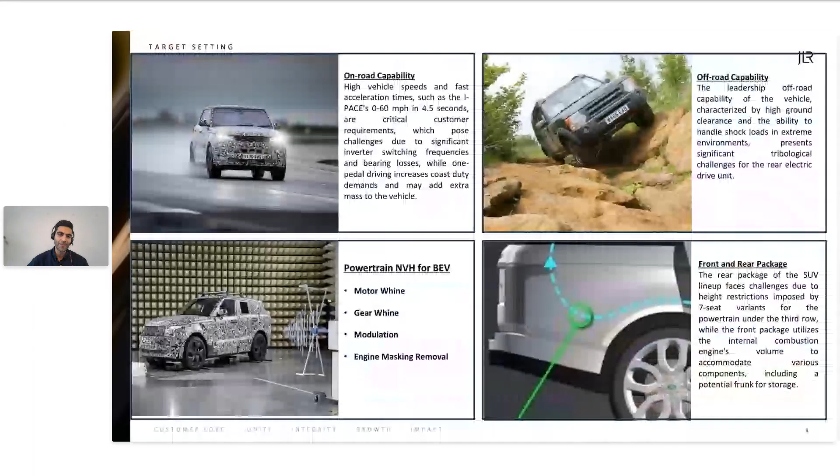Talking about electric vehicles, we have to appreciate the challenges that development of electric drive units is facing in industry. First would be delivering the first attribute and on-road capability of electric vehicles, which is associated with challenges different from internal combustion engines due to the presence of different torque and speed relationships, which I'm going to talk about in a few minutes. I've highlighted here, for example, the fast acceleration of EVs, which applies challenges in tribological contacts.

But on top of all these on-road capabilities, our products are also capable of off-road performance. Off-road performance means not only do we have to have performance within the defined duty cycles, but there are some other duty cycles that mean there are shock loads applied to our transmission components, and shock loads mean new tribological challenges.

In addition to these challenges, we all know that battery electric vehicles are facing some NVH limitations, known as noise, vibration, and harshness. In particular, in transmission development, we are mainly interested in two main challenges known as heterodyne and gear whine. Heterodyne is when two excitations are closely captured but also interacting with each other, and they can cause noise and vibration. Gear whine mainly comes from the contact between the gears in the powertrain, and could be caused by transmission error. So it becomes extremely important to design our transmission systems to avoid these NVH problems.

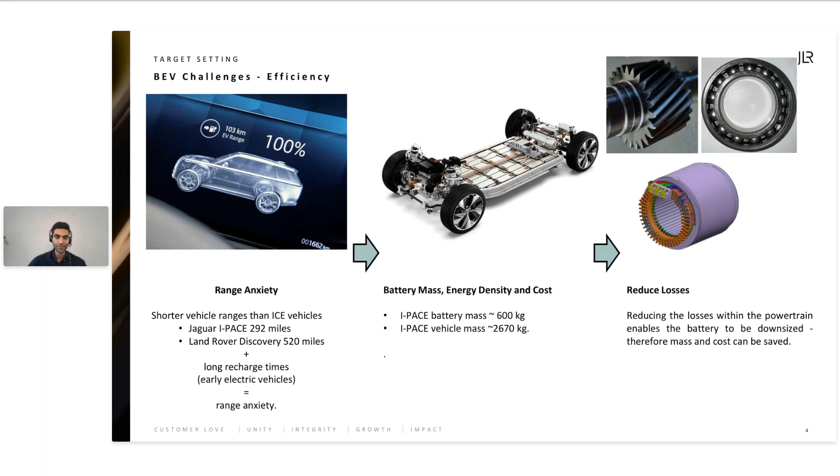It's a good time to talk about the main difference between electric vehicles and internal combustion engines in terms of how torque is delivered within the transmission. In internal combustion engines, we need a certain range of velocity to deliver the required torque, meaning over different velocity profiles we need to change gears to get the required efficient torque transmission.

In electric vehicles, that's different. We can start delivering torque at really low speeds, and therefore we understand the tribological challenges associated with that. The torque then reduces with velocity in order to keep the power constant, so we have constant power at the second curve you're seeing there.

With new developments in electric vehicles, we're moving towards higher speeds and therefore facing new challenges in tribology and tribological contacts, which I'm going to talk about in the next few slides.

Talking about design of EDUs and looking at their efficiency, on the right-hand side you'd see that EDUs are made of three main components: transmission system, e-machine, and inverter, each with a different efficiency profile with respect to motor speed.

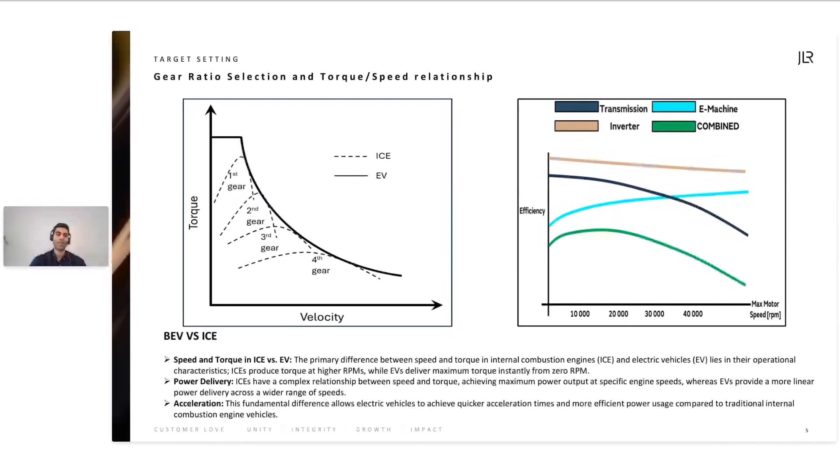But we have to be careful that the efficiency of the e-machine increases gradually with the increase in e-machine speed. Therefore, we have to find a sweet spot for the system where the efficiency of the entire EDU is optimized. This is why we at the transmissions team work closely with our colleagues on the e-machine, cascading requirements between the two teams.

In the next section, I'm going to talk about EDU transmission concepts and a comparison between what we had in ICE and what we're facing in the realm of EVs.

Here you can see on the left-hand side an 8-speed automatic transmission, and on the right-hand side a typical electric drive unit transmission. At first look, there's probably a lot less complication in development of EDU transmissions in terms of architectural complications.

On the left-hand side, you have clutches to take care of and a very complex lubrication system. On the right-hand side, the complexity has been reduced.

There are new challenges we're facing in development of these gear and bearing systems. They're usually two gear stage systems, which I'll talk about for different configurations, but we're facing new challenges compared to what we faced with automatic or manual transmissions for internal combustion engines.

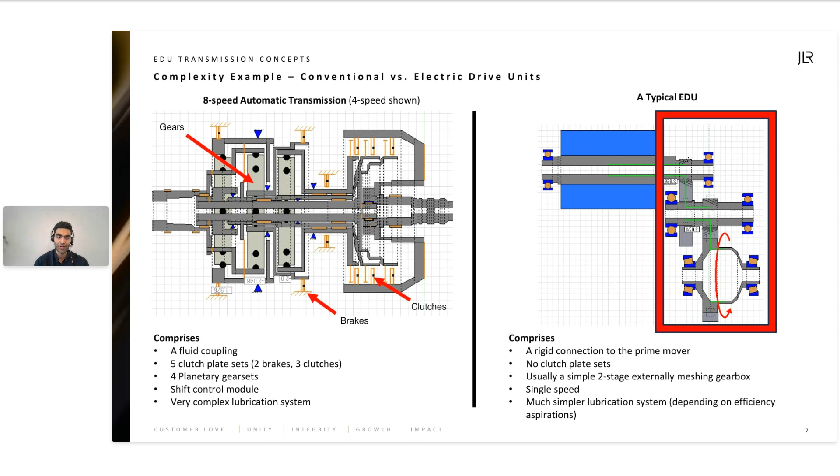In this slide, I'm particularly looking at 2 common types of transmission system. Left-hand side is the concentric layshaft layout, and on the right side, the offset layout. For the concentric one, the e-machine rotor, which is at high speed, is concentric with the output shaft, which is on the right-hand side. That means in order to accommodate them both in the same axis, our EDUs would be wider.

There are some advantages and disadvantages to this configuration. Advantages being compactness of the design, but also wider. Disadvantages, if you look at the 2 gear stages, the center distance between the 2 pinion and the gears is the same, which means the second and first gear stage have the same center distance, and usually the first gear stage is not optimized for performance.

On the other hand, on the right-hand side, you can see the first rotor shaft being connected to an intermediate shaft, and then the intermediate shaft with gear stage 2 being connected to the differential and the output shaft. In this case, you could have better control over the design of your bearings and gears and their sizes. And of course, your EDU would be larger and have a higher volume. So that's the trade-off between efficiency and packaging.

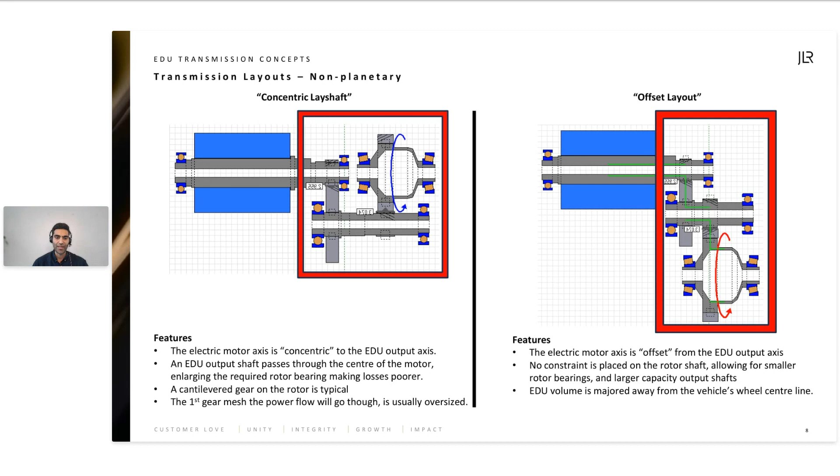The next transmission concept is the planetary concept, which is probably the least common among the 3. The reason is there are quite a lot of challenges associated mainly with NVH problems and the efficiency of the system. NVH because you're having a sun gear in the middle and 3 planetary gears in contact at the same time, which means you would probably look into some heterodyne or gear whine issues because of 3 contacts happening at the same time.

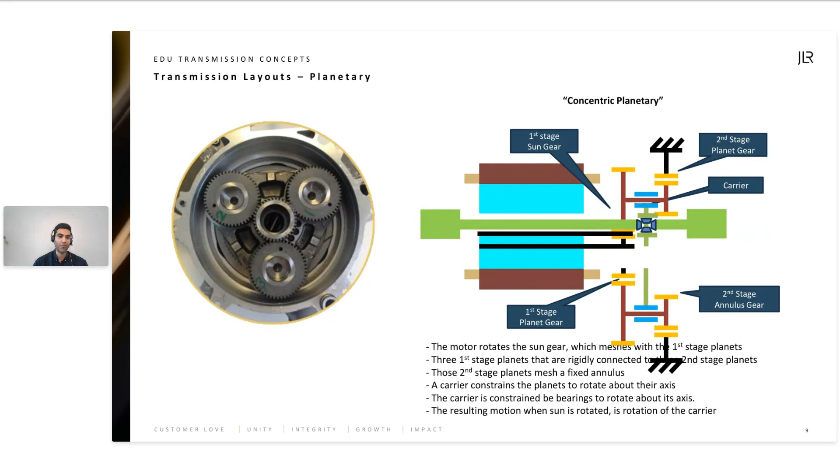And of course, you would have more contact happening, therefore more frictional losses, which is unwanted within the EDU, and we are working hard towards efficiency. Therefore, that would be a challenge for us.

Now that we have talked about different configurations of the transmission system and everybody understands what components we have within the system, let's talk about the main EDU losses, and I would then dive deeper into transmission losses, which tribology would play a great role in. So if we look at EDU, it's made out of e-machine, which is motor, inverter, and the transmission.

Of course, some low voltage components such as the oil pump and the valves and some other components that are consuming power within the EDU. For the E-machine, the main losses are mainly electrical related losses, such as iron losses and copper losses, but also we would have the shaft rotating at high speed, therefore we would have some drag, friction and windage.

What I'm going to be focusing on today would be mainly around the transmission losses, which are our tribological losses, mainly due to the gear mesh, the bearings, and the dynamic seals. I wouldn't focus today on the dynamic seals because that's the least out of these three. But of course, our gear also experiences churning and windage losses as well.

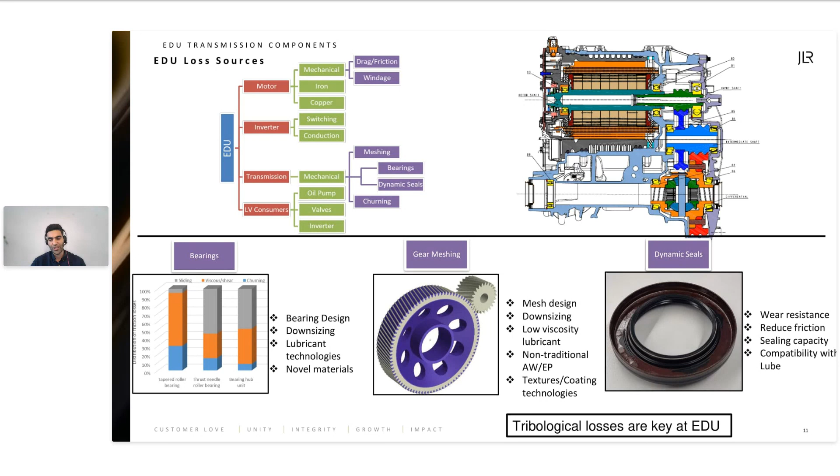We need to understand that within the EDU, we would have different shafts rotating at different speeds. Therefore, selection of gears and selection of bearings based on their performance becomes extremely important to avoid the inefficient operation of the components.

The main two probably being the torque speed, but also we have to consider the fact that our lubricants are lower viscosity lubricants in the EDU. So E-fluids are usually a lower viscosity, so I'm going to talk about them later.

Understanding that for the same speed, you're experiencing an extended boundary and mixed lubrication regime. And therefore, our gears and our bearings have extended more severity of contact, which should be taken into account.

So just to highlight the challenges we're facing within the contact of bearings and gear mesh is, of course, the high speed we're experiencing for our bearings and gears, and that means high contact temperatures and high thermal losses.

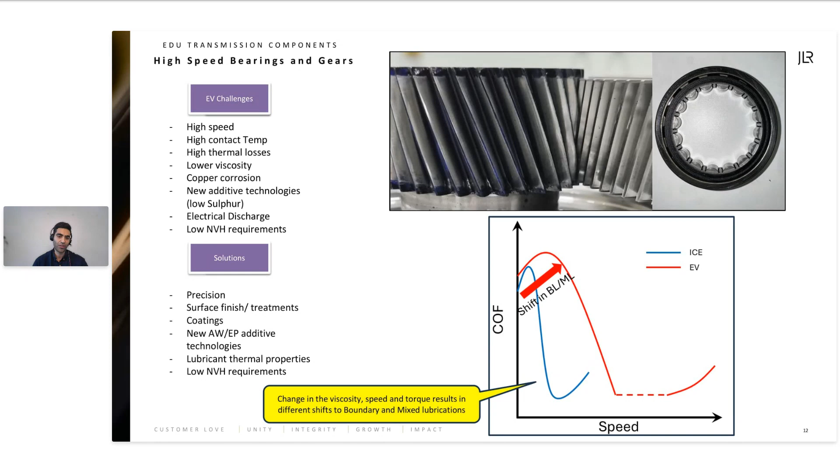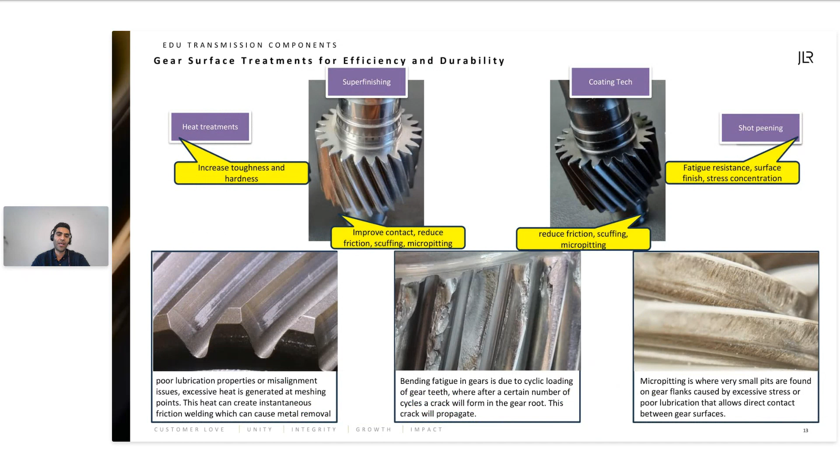I have highlighted three main failure modes that our gears are experiencing: scuffing, bending fatigue, and micropitting, each explained in the text. There are routine surface treatments to increase the efficiency of these components, but also their durability. Heat treatments are conducted to increase the toughness and hardness of gears. Super finishing, although expensive, is an important surface treatment to improve contact, reduce friction, and thermal dissipation at the interfaces, therefore reducing scuffing and micropitting. Coating technologies could also help reduce friction and increase scuffing and micropitting performance of the gears. And shot peening is something the gear industry has been doing for quite a few years.

Talking about the contact, we would have lubricated contacts within the EDU, which means the lubricant would play a major role in the tribology of electric vehicles.

There's a big demand for OEMs and lubricant suppliers to understand this region of application for extreme pressure and anti-wear additives.

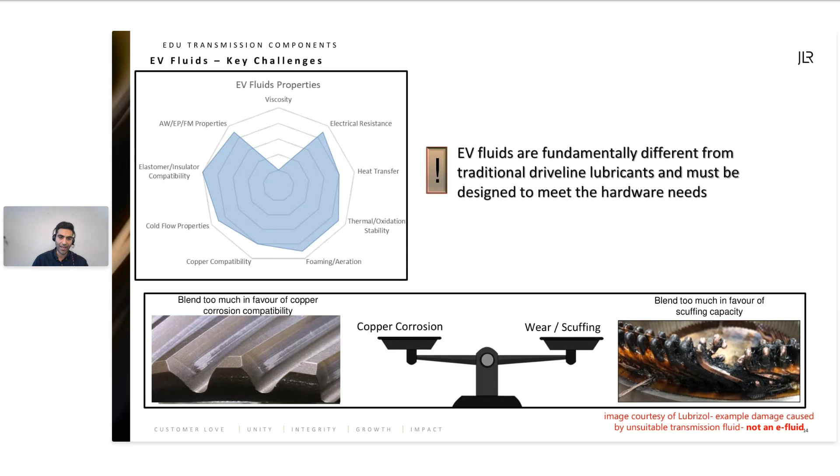In this slide, I would be talking about electrical conductivity. We all understand that within an EDU, there would be high electric fields and high magnetic fields. That means the lubricant should be compatible in this scenario, which means we want the lubricant to have certain electrical properties.

Lubricants should be dielectric, which means it's really important that they have certain electrical resistivity. We want them to have high resistivity, but we don't want the resistivity to be too high, because if they don't dissipate charges, it means charges accumulate and lubricant additives degrade. So that is unwanted. There is actually a range of electrical conductivity that we would like to see. If the electrical conductivity of the lubricant and the dissipation factor are not working well, you would see all sorts of problems within the EDU, such as additive degradation, bearing and component damage, electric discharge, etc.

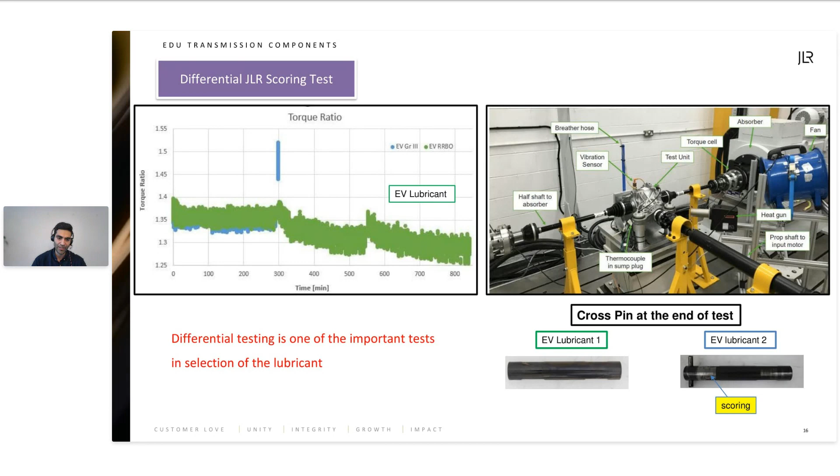Last but not least, we have worked hard to understand how these new additive technologies work within our transmission system in terms of friction, and the friction properties are of great importance to us, as we want more efficient transfer of power.

So we have been running a large number of tribo tests with the help of our suppliers to understand, in rolling sliding and in pure sliding contacts, what are the friction coefficients of the current lubricants and the lubricants that we're developing with our suppliers.

On top of that, cooling performance of our lubricants becomes really important because of the high speeds in bearings and gears, and therefore cooling them off. But not only that—it's also the e-machine that has to be cooled off if you're using the same lubricant for cooling the electric motor.

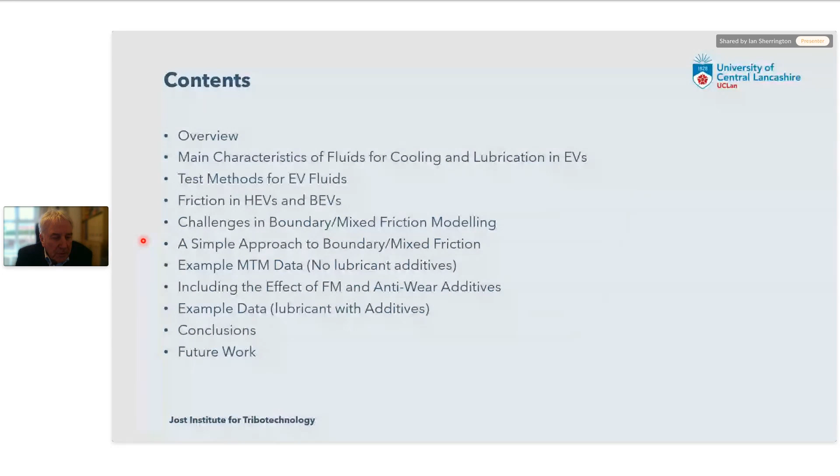The presentation will break down neatly into two parts. The first part will discuss some background on electric vehicles and electric vehicle fluids, and the second part will present this friction modeling technique. Essentially, what we've noticed is that approaches to mixed and boundary friction modeling either tend to be extremely simple or extremely complex, and in some cases generally erroneous as well, so they don't give accurate data. So what we've tried to do is produce a compromise model which will allow accurate, simple modeling of mixed and boundary friction components, and you'll see why this is in some detail as we go through the presentation.

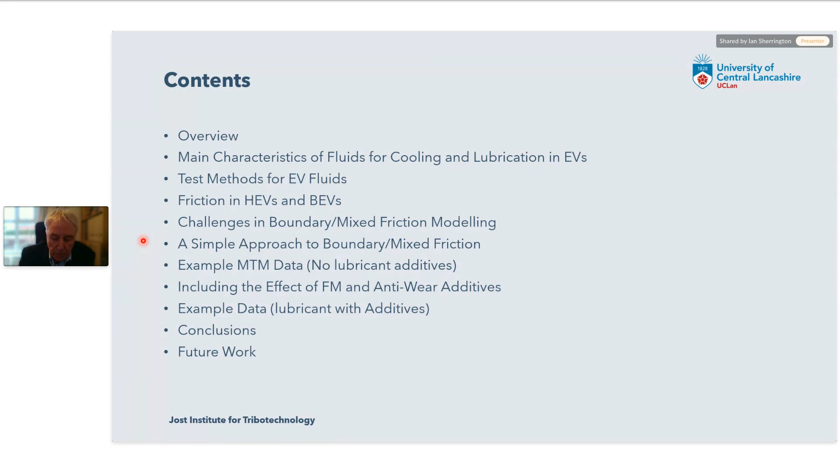So just by way of background, everybody's aware that the electric car stock globally is increasing substantially. In 2022 there were 26 million electric vehicles, but that's only between 2 and 3% of all passenger cars that we use. It's important to realize that nearly half of those are in China. China is a really big player in the EV market, not just in passenger cars but also in buses, several hundred thousand electric buses operate in China.

Although the growth of electric vehicles is rapid, there are some considerable engineering challenges being faced by this industry, and Ali mentioned some of them, but I'll mention some again. There are issues connected to manufacturing infrastructure. If we want to replace all the internal combustion engine vehicles we produce with EV vehicles, we need to considerably up the game globally to produce manufacturing infrastructure suitable for this kind of technology, particularly the batteries. The battery technology is well recognized as something that needs to rapidly improve. Ali also mentioned range anxiety, so in addition to that, not just is the range short, but the charging infrastructure is generally speaking quite poor. It's hard to find somewhere to charge your car away from where you live, and it can take quite a long time.

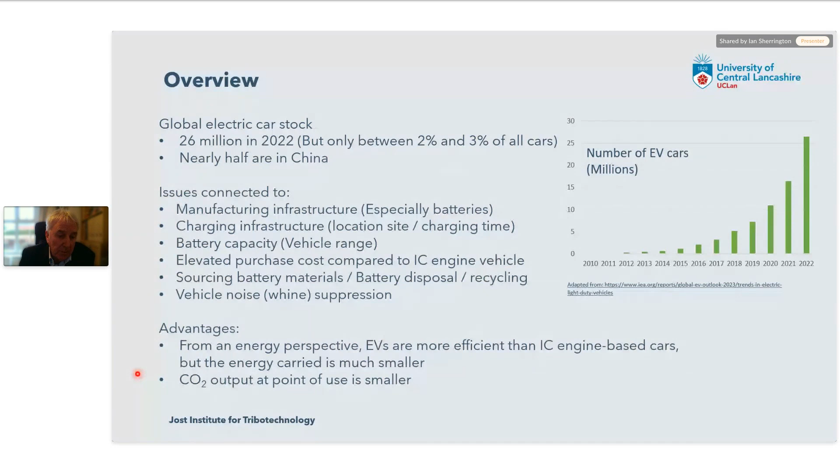We have two common types of EV, battery electric vehicles and hybrid vehicles. Compared to internal combustion engines, EV fluids need additional capabilities. For example, they need high thermal capability. You might argue that IC engines also need fluids with high thermal capabilities, but it's different for EVs because quite often they're filled for life, so we need to keep operating temperatures very low to prevent lubricant degradation.

We need to have high thermal conductivity to take the heat away from the mechanical elements that we want to cool. As one of Ali's slides ably demonstrated, there's a challenge here because the thermal conductivity and the specific heat capacity are in direct opposition, so as we increase the conductivity, the thermal capacity tends to go down.

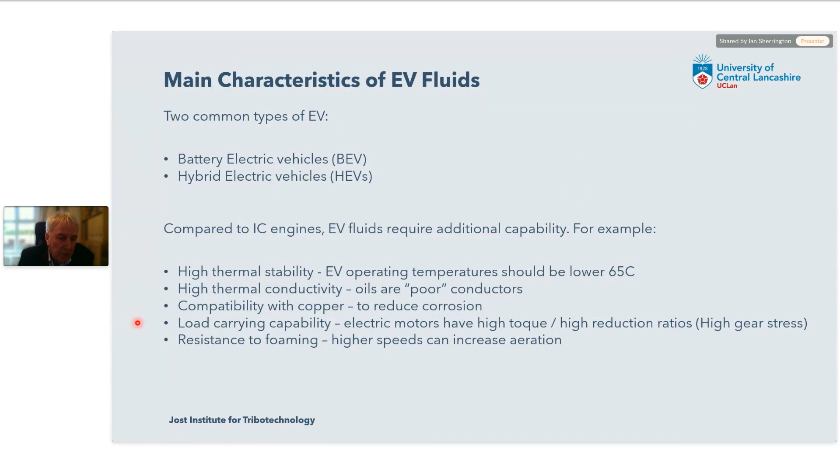We need compatibility with copper, and we need fluids that have high load carrying capability. The greatest torque appears at the lowest speeds with the highest loads, and we need to manage the high stresses that places on lubricants. And there are lots of other requirements as well, resistance to foaming and so forth.

There are a whole host of tests that we can apply to these fluids to see whether they're suitable for a particular application. This is by no means an exhaustive list, but here are some of the tests required for wheel bearing lubricants. We need to make sure these fluids pass these various tests, and the suppliers of the fluids have a significant challenge to make sure that these tests are passed in all cases for all vehicles, in the same way that we've developed these kind of global lubricant tests for internal combustion engines.

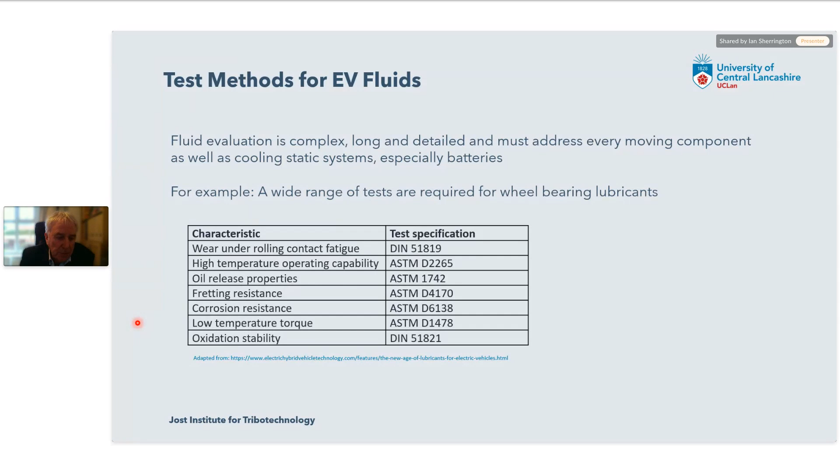And of course, to maintain the efficient operation of EVs, these fluids must have low friction. And in the same way that we want to predict the range of IC engines, we might want to predict the range of EVs. This is important because it allows us to understand what the theoretical operating range is going to be, what the charging requirements are going to be, and to some extent what the ownership costs of this vehicle are going to be from an operating perspective.

Modeling fluids has been done for a long time. Modeling contact friction has been done for a long time, and we have used various kinds of models for this. Hydrodynamic models and EHL models are well established, and running alongside that, boundary mixed friction modeling is not so well established. What we find in this instance is that these models are quite often, as I mentioned earlier, very simple but not very accurate, or complex and difficult to implement.

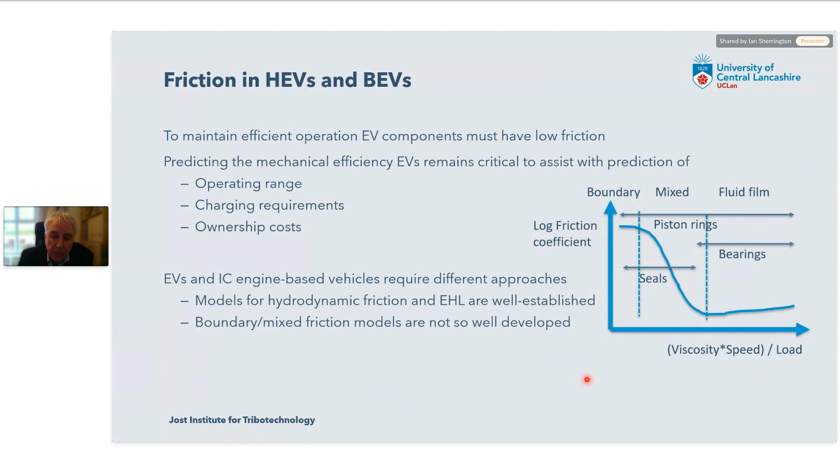And what we want to do with these models is to try and understand the Stribeck curve, try and predict the shape of the Stribeck curve, so that we can use data that we can easily get our hands on, either these duty parameters or the lambda ratio, and understand what kind of friction may result from one of these contacts. Why is that important?

Well, for a long time, internal combustion engines have been modeled using hydrodynamic lubrication. My feeling is that this has been done because it's comparatively easy to do. So full fluid film lubrication models are very common, while lubrication models which also incorporate mixed and boundary lubrication are less so. And I think it's tended to push us in the direction of believing that actually mixed and boundary friction isn't particularly important. And I think it is. I think it could be quite a significant oversight that we've made in our modeling of all kinds of mechanisms.

There's a couple of examples here. The first one is this axle mechanism. You can see that there are two power loss columns here.

Without the boundary modifier, the power losses are given in this column, but with the boundary additive, reducing the friction, you can see the friction comes down enormously. Obviously it's speed dependent, so at faster speeds the difference is less when we get a more complete fluid film, but at lower speeds we get considerable changes when we introduce this boundary additive. That means boundary friction is present, and incorporating the additive brings significant gain in reduction of friction.

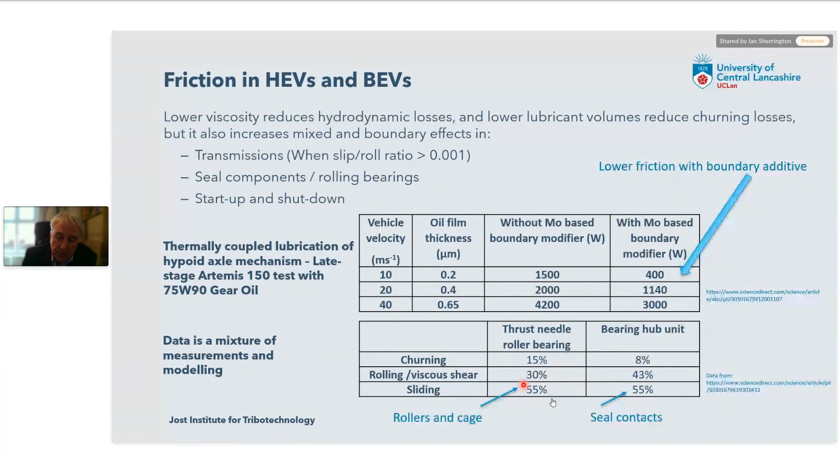Similarly, if we look at other components, such as a needle roller bearing and a bearing hub unit, you can't see this number here, but it's 55%. These proportions are a significant proportion of the losses in these particular types of component. So if we don't model these, we miss quite a lot of the friction contribution that we should be seeing in our models.

As I've said, friction coefficients can be modeled. We might use linear models, or we might use quite complex models that involve predicting the deformed real contact area using various kinds of surface contact models, such as Greenwood-Williamson, and average flow modeling to get flow coefficients for the lubricants. So they're either simple, in the case of linear models, or complex and not easily implemented.

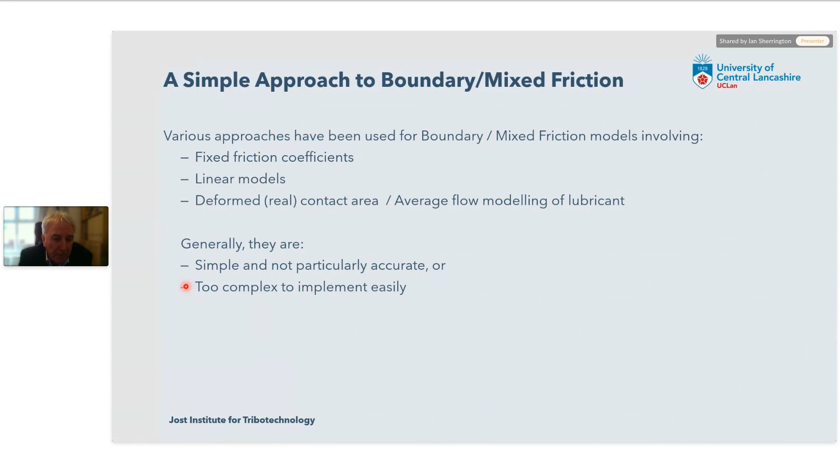What we wanted to try and do is put together a model where, if you can calculate the lubricating film thickness in a contact, you could very quickly, perhaps in an hour, build a little spreadsheet to predict the boundary and friction power losses that go along with that.

So this is how we went about that. Most of you will recognize this: the lambda ratio. We can characterize the various regimes of lubrication, boundary, mixed, and hydrodynamic, by taking the ratio of the film thickness and the square of the RMS roughnesses, or RQ roughnesses, adding them together and taking the square root. By looking at the ranges of the resulting parameter lambda, we can determine which regime of lubrication we're in: boundary, mixed, or full fluid film, as we work our way through the Stribeck curve.

Very commonly on the bottom we've got duty parameters here, which involve viscosity, load, and speed. However, we can replace this axis with the lambda value. So as the lambda ratio increases along the x-axis from 0 to, let's say, 3, we can move through the various regimes.

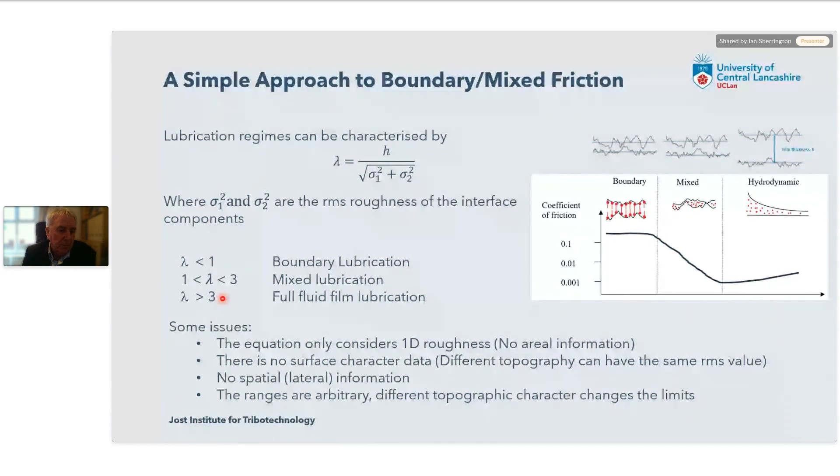There are some flaws in this theory, and I'm going to mention them now so you understand I appreciate them. The first is that this equation only applies for 1D roughness; it doesn't incorporate areal surface data information. There's no surface character data, so surfaces with different topographies can have the same RMS value - that's a flaw in the arrangement. There's no lateral data in the model, and the ranges selected here are arbitrary. They're really selected around the idea that the surface topography would be randomly distributed, and if you get more than 3 standard deviations away from the mean, it's very unlikely there will be contact between the surface asperities.

So this is the method. Normally we can start off with some measured data or a Stribeck curve like this - it doesn't need to be our own data, it can be data from someone else's work. What we suggest is that this friction data, this Stribeck curve, is normalized to produce a parameter x, which varies between 0 and 1, and tells us the proportion of mixed to boundary lubrication.

We can normalize it by dealing with the y-axis here. We can subtract this fluid film friction from the boundary film friction to generate a number which varies between 0 and 1, subtracting this limit down here from the friction at the point of lambda where we want to operate. What we find is that this equation for x, if we adopt real data like this, turns out to be very nicely modeled by this equation here.

So this is the equation for a sigmoid curve, and essentially we can model this equation by considering just the lambda ratio and these two constants, k and a. In our measurements, we found that k is 3/2 and a is 4/3. Once you've got this data, you can very easily calculate the friction losses in a contact, provided you know what point in the lambda range your contact operates - and you get this by predicting the film thickness and dividing it by the sum of the RQ values squared, square rooted.

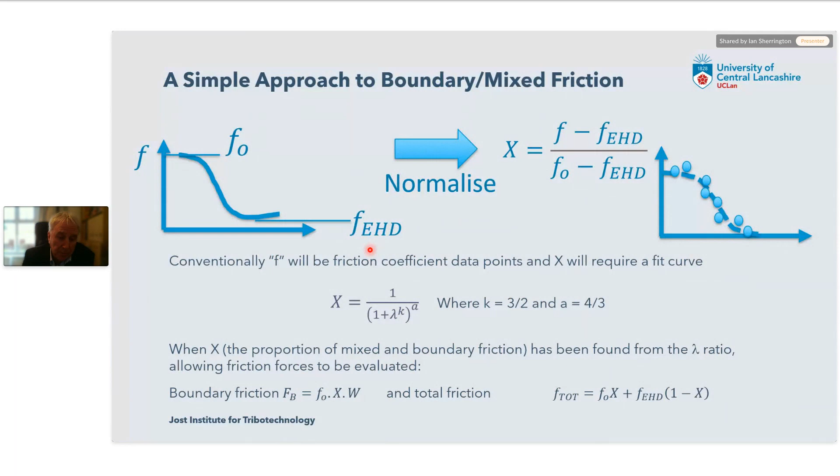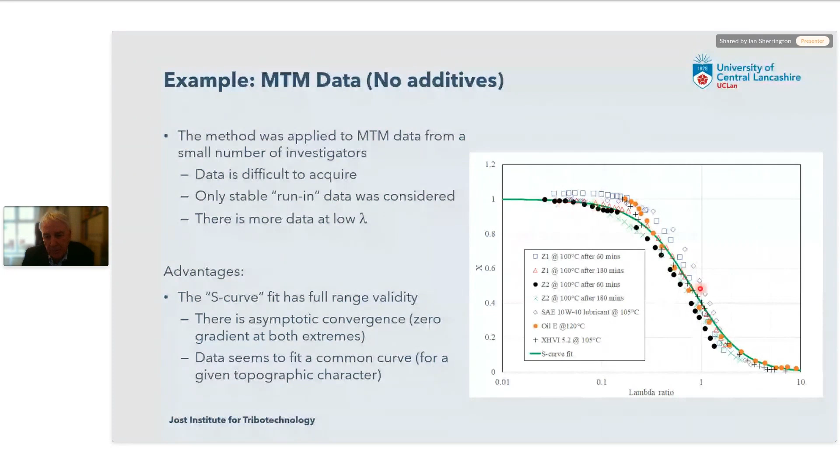The great thing about this curve is that it's got full range applicability, so it will run us straight from boundary lubrication through to full fluid film lubrication. We have asymptotic convergence between the various regimes, which you don't always get with other models. And finally, this is for lubricants that don't contain additives, and it seems to collapse reasonably nicely onto one fit curve, which is convenient for modeling.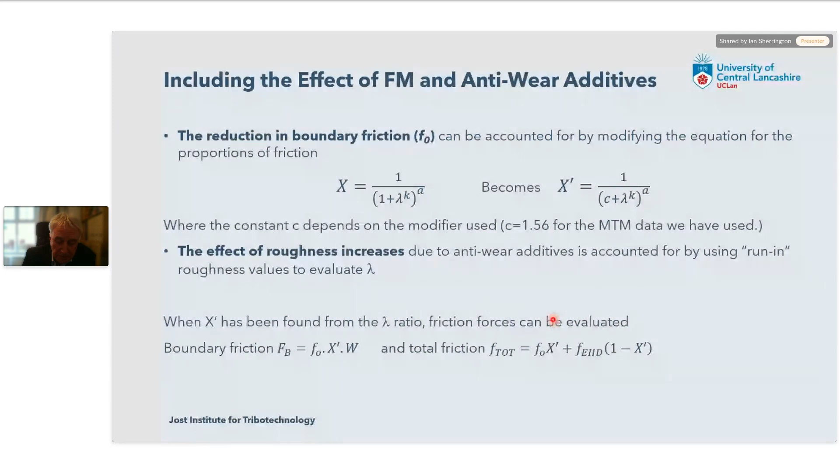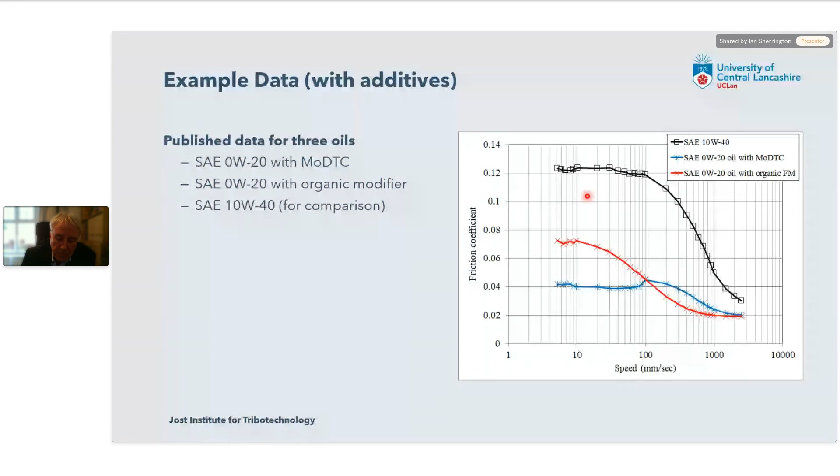How well does that work? Well, here's some published data from 3 oils which we selected for our analysis, and here are the fit curves to those 3 oils. You can see that the fit isn't perfect, there's only one set of data. One of the key things here is it doesn't all collapse onto a single curve either, which is slightly inconvenient, but nevertheless still a lot simpler than addressing the problem using surface modeling techniques.

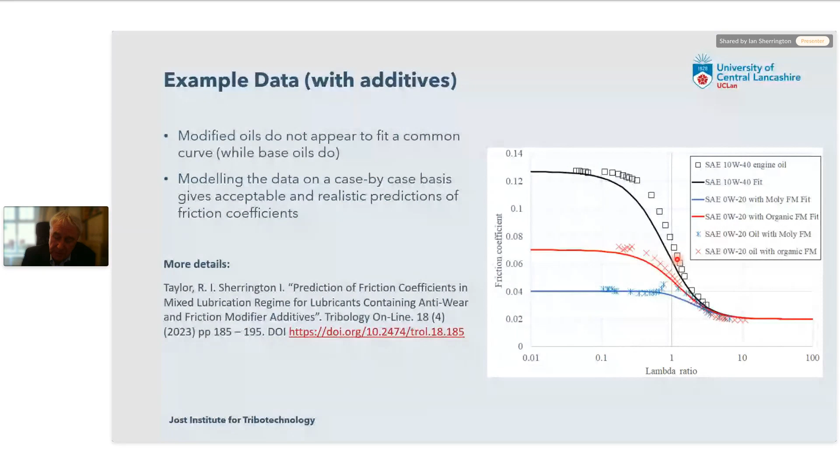So our argument is that this technique can also be used for additivated lubricants as well. It's just that you need some data for each lubricant you want to test, in order to be completely certain that you've got a good idea of the fit.

So moving towards a conclusion, for oils without additives, we believe we've got a really quite accurate model for predicting friction in the boundary and mixed regimes. It's quick to implement, easy to use, and appears to be accurate because it's based on experimental data.

We can also model modified, additivated oils. They don't collapse onto a common curve, but you can still use the same technique provided you've got data on a case-by-case basis for each lubricant.

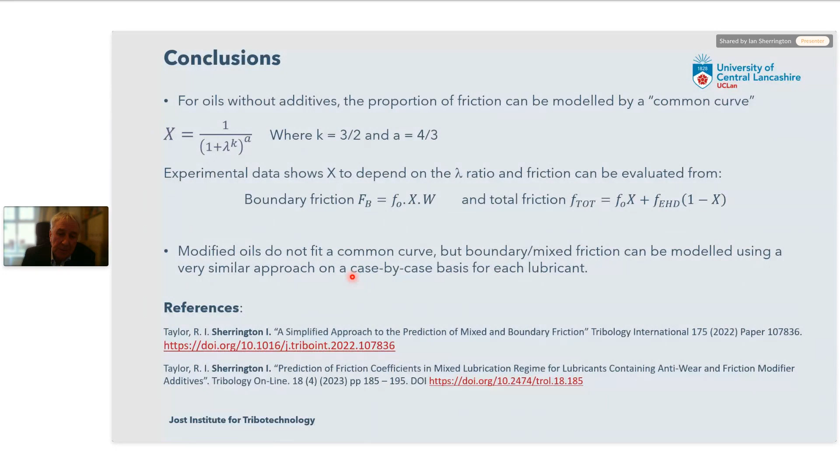We're going to carry on with this work, and there's something important in mind. Climate action and responsible consumption and production are critical to the future of the planet. We live in a time where we've got a climate crisis, and as engineers, we have a responsibility to support sustainable growth and the development of a low carbon transport and infrastructure for the future.

In the same way that we've spent a lot of time accurately modeling internal combustion engine vehicles, what we'd like to go on to do is produce models that allow us to understand how HEVs and BEVs would behave in theory, using friction modeling of friction losses and mechanical components, all of them in the vehicle, by understanding auxiliary losses, by incorporating tire road friction, aerodynamic losses, effect of battery mass, and so on.

We're looking for partners for this, so if you're out there and you're interested in talking to me about this, please send me an email and we'll be very happy to discuss collaboration with you.

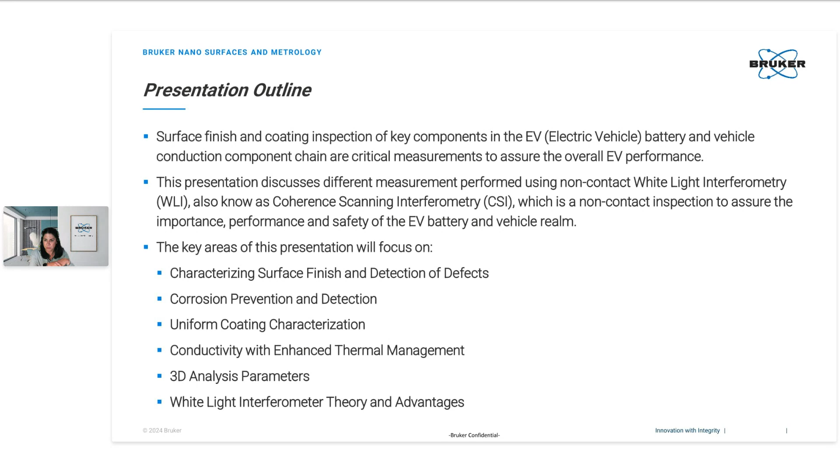So let's go first into the characterization of surface finish and detection of defect. So why is the characterization of the surface finish such a critical part, and why is it such a key role?

When it comes to electrical components, such as electrical contacts in batteries, the cathodes and anodes, connectors, switches, and circuit boards, the surface directly affects the contact resistance. This means a smooth and clean surface finish promotes better contact between the conductive materials, but also reduces the resistance, which leads to improved conductivity efficiency and lower component temperature.

In comparison, a rough or uneven surface results in smaller contact areas, which can lead to higher resistance, reduced conductivity, and is also decreasing the component integrity. So hence the inspection of the surfaces assures the performance of each component.

Here WLI, white light interferometry, can provide a high accuracy, non-contact method to validate your surfaces without any impact by the measurement itself. A further advantage of this technology and method is that by using the same 3D image of the surface we are measuring, you can detect and characterize also defects and not only do one measurement at one image.

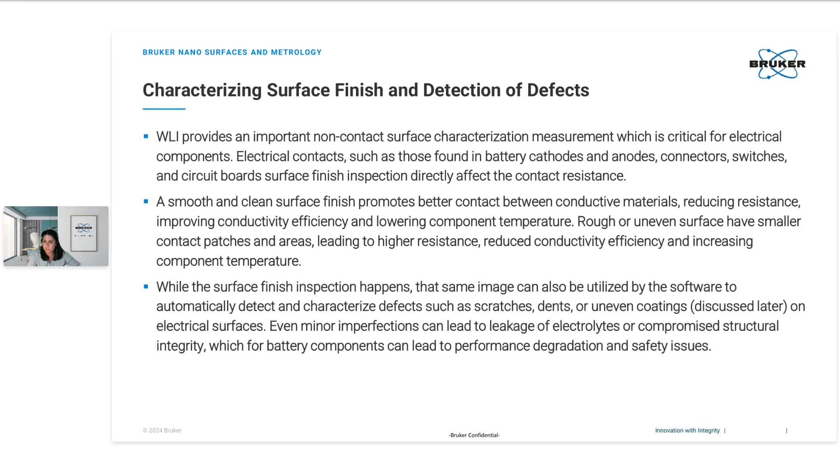When we take a look at some examples, this is a very great example where you can see a highly pitted surface, which is pitted from a cleaning process. And this pitted surface can lead to or can cause poor contact.

When we are measuring now with WLI, we can fully automatically measure the surface itself, but then also analyze and detect the pits and then get a full overview of the quality of the surface.

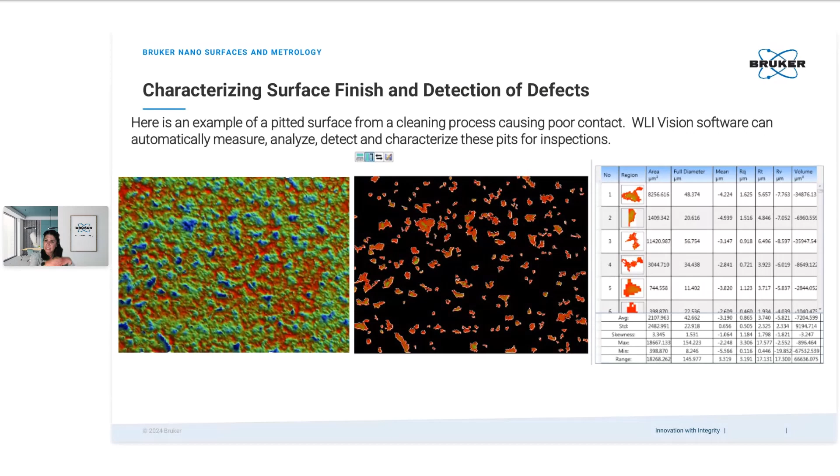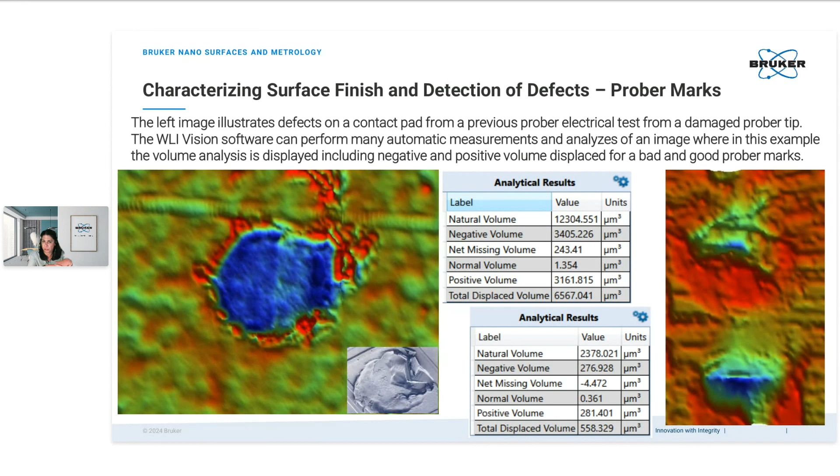The next example on the surface finish itself illustrates the measurement of large EV battery canisters. The surface finish of the sidewalls as well as the bottom of the canisters have a direct impact on the functionality, but are very difficult to access with metrology systems or with metrology itself.

Furthermore, it is very difficult because the canisters have a certain size or height, so if you want to measure the bottom of it, you also need certain objectives. We have very long distance objectives where we can then reach down to the bottom and check how flat it is, and whether there are any things that prevent the surface finish from having good contact.

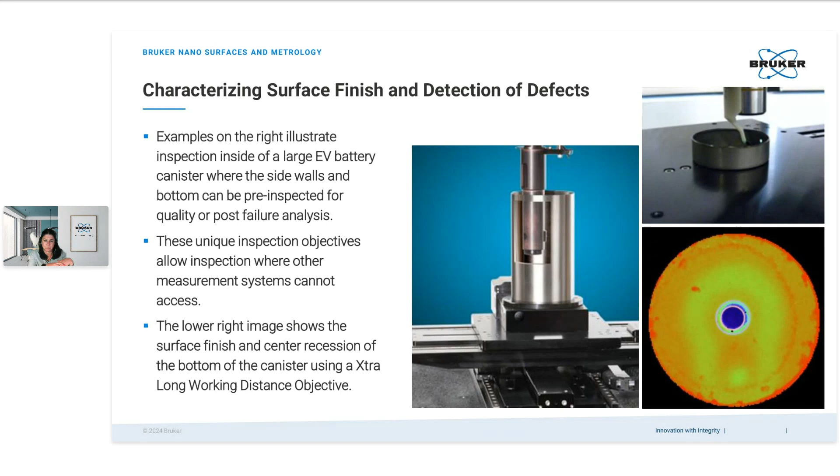A further key topic in EV is also corrosion prevention and the detection of it. Corrosion itself can weaken the battery casing and of course the battery material itself, which can then lead to leakage of electrolytes, decreased battery efficiency, and it can also shorten the performance and the lifetime of it.

Furthermore, corrosion can also degrade the conductivity and can form insulating layers, which also increases the resistance of any contact.

So in this case, the detection and addressing of corrosion at a very early stage, either during research and development or during quality inspection, highly improves the performance and the lifespan and lifetime of the battery itself.

So therefore, this surface measurement with WLI can really indicate and assist you in the improvement of the protection against corrosion of your parts.

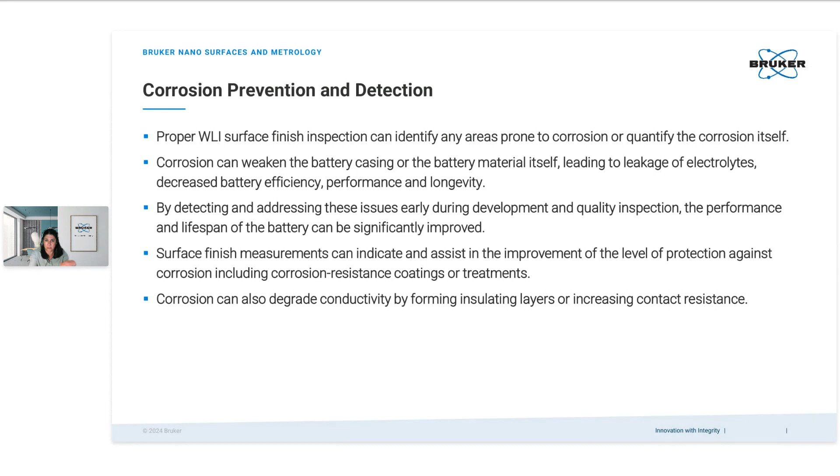So as a result, you can receive a complete quantitative characterization of the surface.

A next key topic is uniform coating characterization. A consistent and uniform coating on the battery and electrical component surface is essential for efficient performance and isolation. Coating needs to be applied evenly, preventing missing areas or excessive thickness or thinness, which can all lead to reduced performance, degradation, or a shortening of the battery's lifetime.

With WLI technology, you can either measure through transparent or semi-transparent coatings, or measure the coating step from the bare material onto the coating. When measuring through the coating, the thickness can be measured anywhere on the surface, allowing inspection of the top and bottom surface coating along the whole thickness uniformity. The big advantage of WLI, in contrast to any contact method, is that the surface itself does not get manipulated, changed, or damaged. This is especially important when you have flexible coatings or any coatings that cannot be touched, changed, or transformed by the measurement itself.

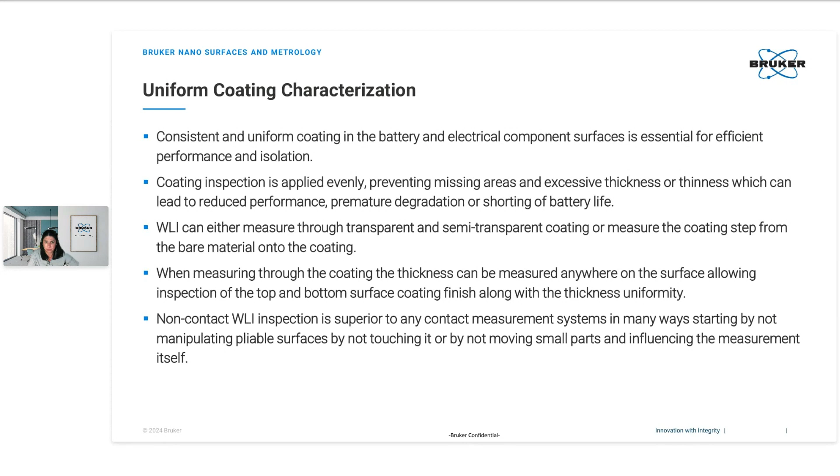Let's now take a quick look at the theory of how we measure thick films with WLI. For measuring a transparent or semi-transparent film, we measure a step from the top of the film to the bare substrate. The maximum measurable thickness is only limited by the scan length of the profiler you're using, which in our case is 10 millimeters. The minimum reachable film is between 50 to 100 nanometers, which is more or less limited by most film materials, because below that height the films are not opaque anymore.

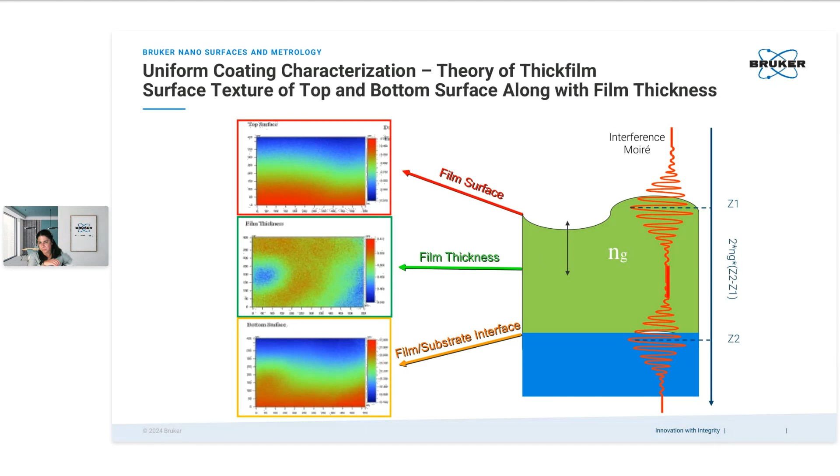A further big advantage of this way of measuring, as you can see in this example, is that not only can the thickness of the film be measured with all the average and roughness parameters, but you can also get the top surface and bottom surface information within the same measurement. So you get detailed information along the whole film thickness. If you want further information on film measurement, you can find an app note about it in the symposium download area.

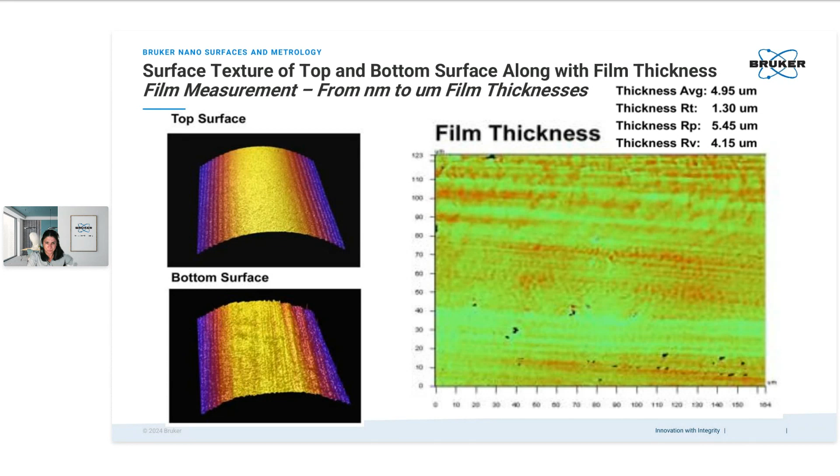Now let's jump into conductivity with enhanced thermal management. Surface inspection can also improve the thermal management of battery heat dissipation components. Irregularities in the surface finish can hinder heat dissipation, which leads to overheating and reduced performance. A smooth and uniform surface finish definitely helps with efficient heat transfer.

The quality of the conductive surface finish, whether smooth, matte, or roughly textured, directly impacts the distribution of current across the whole surface. Most of the time, plating the surface with a metal coating is a typical way to enhance electrical conductivity and inhibit corrosion. A smooth, high quality finish indicates fewer surface irregularities, allows for more uniform current flow, and minimizes points of high electrical resistance.

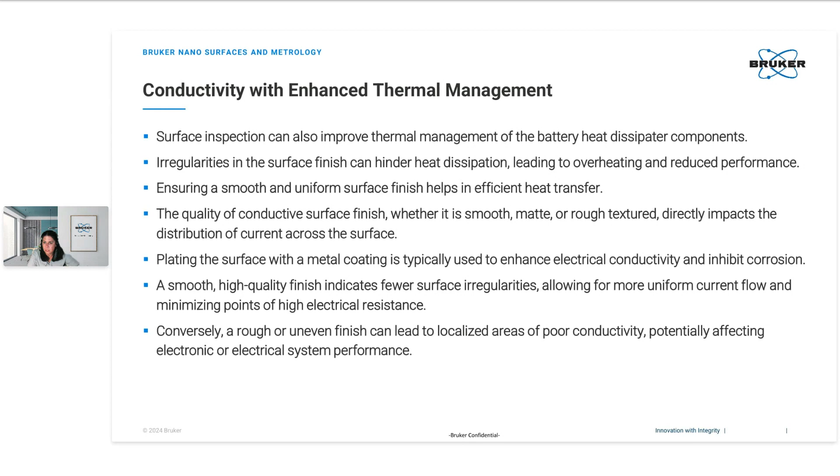In comparison, a rough or uneven finish can lead to localized areas of poor conductivity, potentially affecting electronic or electrical system performance. In the next slides, you can see some typical measurement results of machined surfaces.

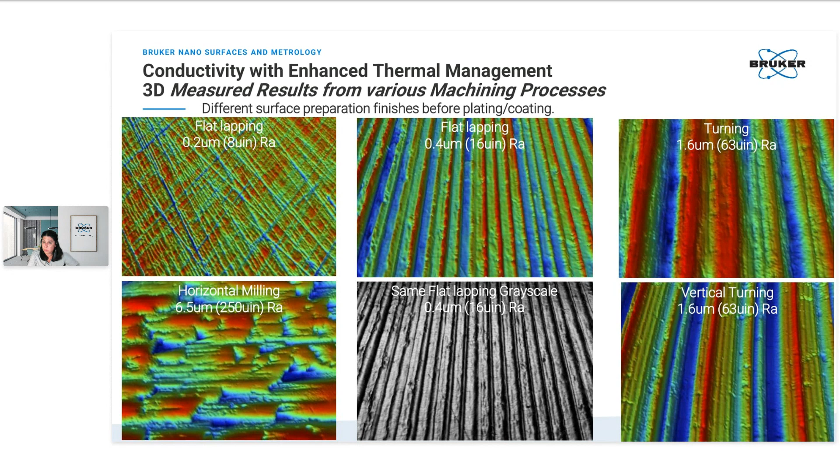On the next slide, you can see it even more clearly. We have totally different surface finishes, a totally different way this surface would conduct or distribute the current, but they have the same RA value.

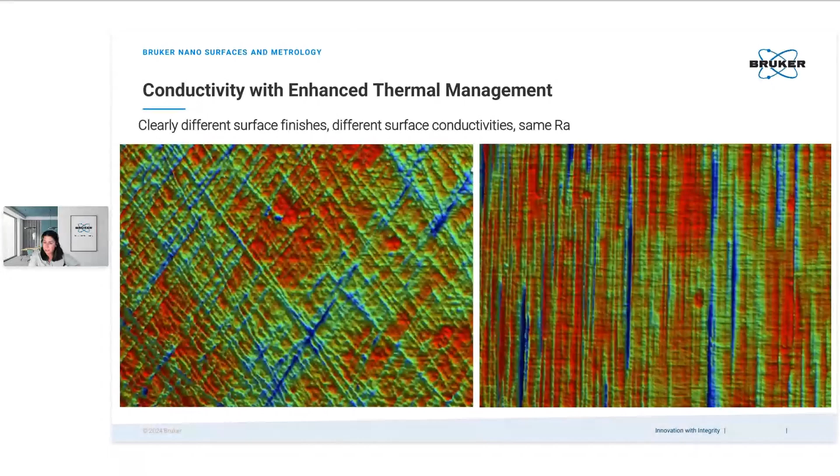And to the RA value, we will come a little bit later in the next slides.

Here's another example of using our software to check on the appearance of some material. For example, if you have paint, there is a very typical finish that always fails or wants to be avoided, the so-called orange peel. You can see on the right hand side a 3D image of the typical orange peel, which always leads to not very good appearance of the paint. By using our 3D spatial frequency parameters, we can check on painting, the appearance, and check when it passes or fails in terms of appearance or other parameters you want to look at.

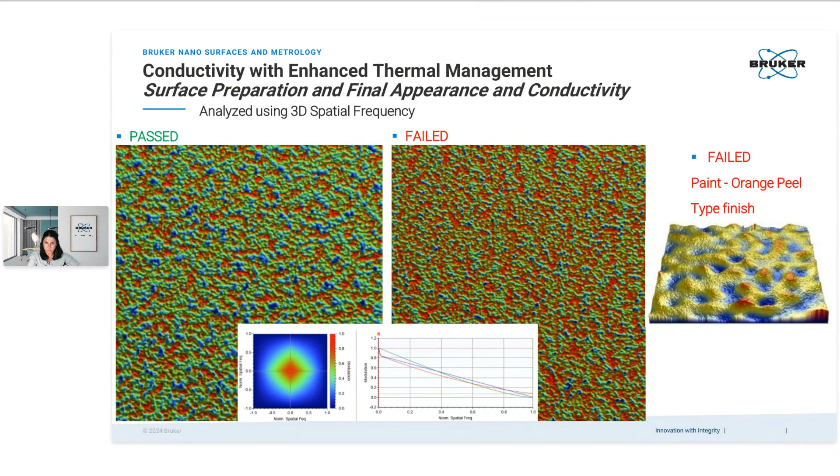So now you have heard a lot already, a few of these analysis parameters, and in the next slides we would like to get a little bit of a closer look at them as a short overview.

So in order to characterize a surface finish or surface topography, there are three main characteristics used: roughness, waviness, and the lay of the major surface features, which is nothing else than the direction of major surface features. Roughness and waviness are the two main characteristics to observe and control, for example, friction, and transfer layer formation caused by sliding, wear, coatings, or lubrication retention. Both characteristics are also well established for qualifying the visual appearance, for example, like in paintings.

Also, each manufacturing process of the material produces a certain surface texture that can be described by different surface texture parameters. On the right side you see a table with very typical machining processes and their expected corresponding RA mean roughness value. Here you can see it for metal cutting, what is the expected roughness, for example milling, for abrasive materials, casting, forming, or others.

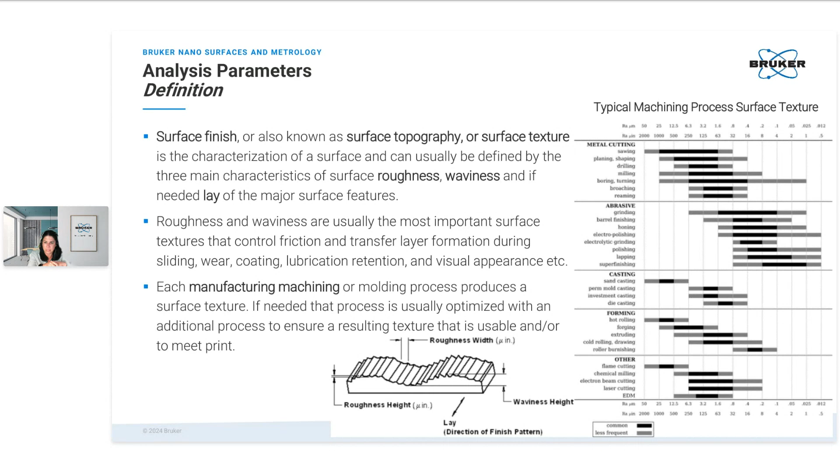So when you see all these different applications, which parameters should now be used for what, or with which applications parameters can you work with? There are several out there. To give you a short overview or a little bit of direction, when it comes to the surface texture and the quantification, the so-called S parameters, the areal functional parameters, are the most accurate ones to use. Why? Because these parameters give you more details about the area you are controlling or inspecting, over a profile, for example, where a lot of information about the surface can be hidden. These parameters can be divided into four different groups.

The amplitude parameters, the spatial parameters, hybrid parameters, and functional parameters. So the amplitude parameters are the analog ones to the 2D parameters, which are assessed via height data and form, and are already well known in terms of like the SA or the SQ, which are the analog parameters to the RA or RQ values.

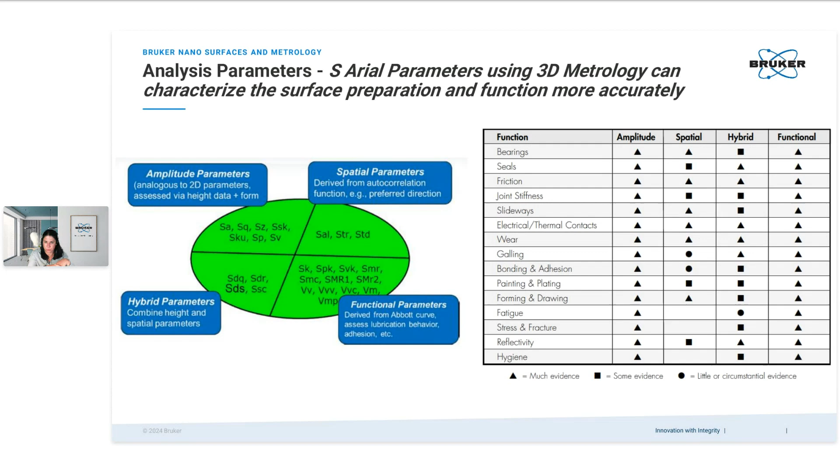And when it comes to the functional parameters and the Abbott curve, this is a direct function from the surface texture profile. The Abbott curve is also called the material ratio curve. So here, the areal material ratio gives you a very wholesome way of the information of the core material, the core roughness, but also of all the valley depth.

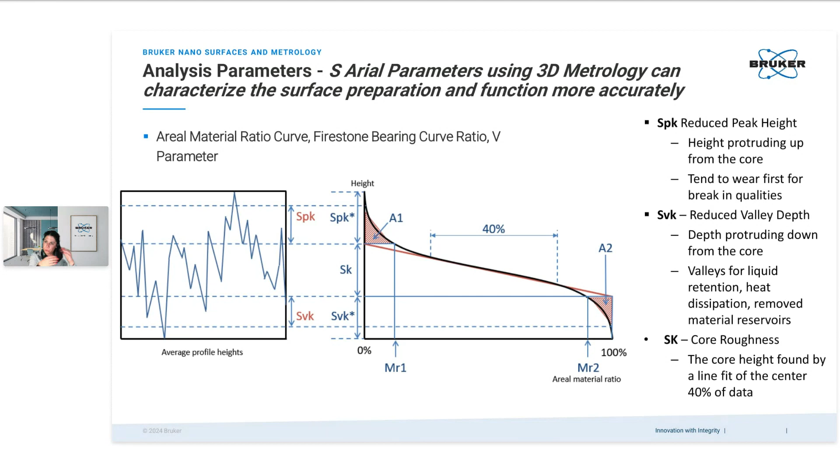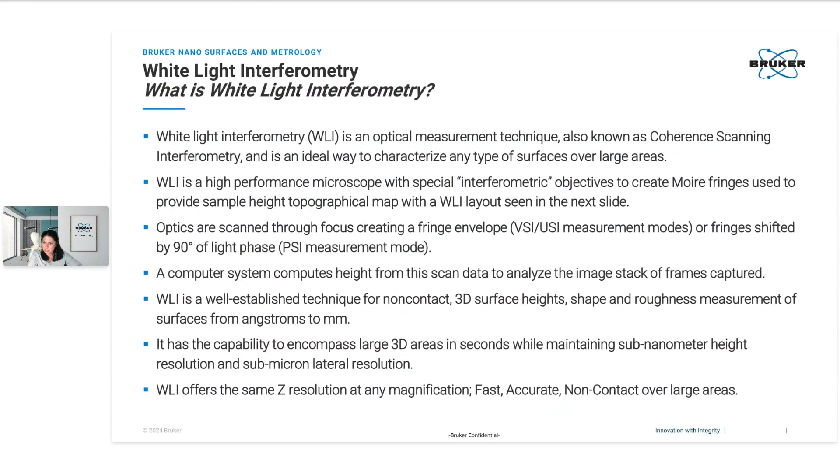So, but how does white light interferometry work? In a matter of time, I will skip over this slide and directly go to our white light interferometry measurement system or how it directly works.

On the left side, you can see the basic components of a white light interferometer. From a light source itself, which is in our case either a green or a white LED, we introduce light into the optical path. The light then gets split into a beam, which is a reference beam, directed to a reference mirror, and into a measurement beam, which is directed to the sample itself. Then both light beams are combined together at the beam splitter and focused with the camera, and there it forms an interference pattern. From this interference pattern, the measurement is translated into peaks and heights of the surface, and so a surface is measured.

So with this technology, you have a technology that is universal for all applications. For all objectives, for all magnifications, we have the same high accuracy, the same high vertical resolution. We can do fast measurements over large areas. We can also, with unique objectives, access difficult areas like vertical walls, such as in battery canisters.

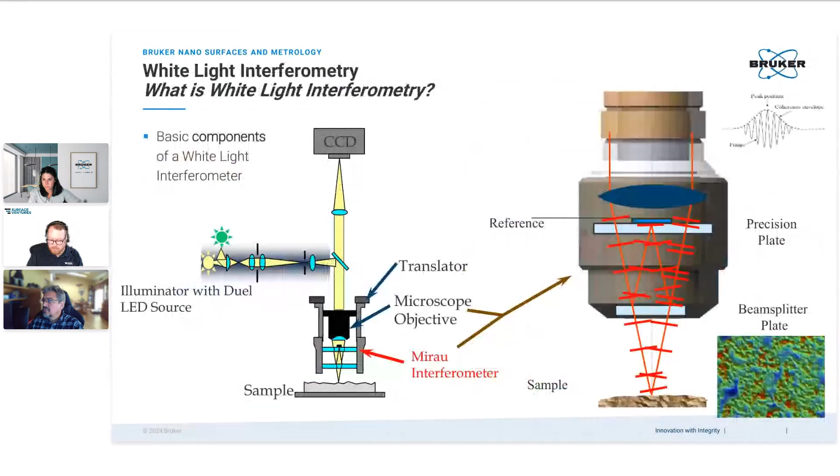Yes, I believe on one of Sandra's slides we discussed corrosion detection, the same type of measurement, and automatic analysis could be used then to look for any surface defects. You can actually tell it how deep of a defect you want to detect, and then the size limit if you want to put a lower limit or upper limit, and do that analysis.

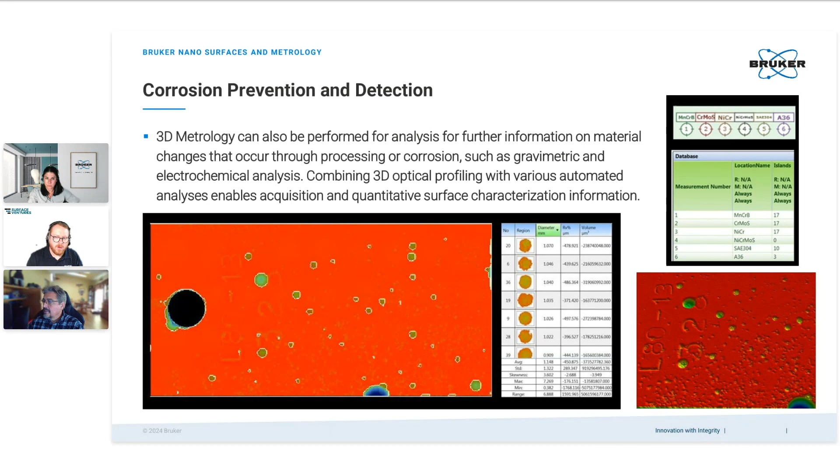Okay, great, thanks. And a nice general question here from Matt, who asks: what are the advantages of white light interferometry over other non-contact 3D methods such as structured light?

Oh, very good question. Structured light typically is like a fringe projection where it generates fringes over the whole surface. The advantage they have is probably large area - they can do a whole gear and compare it to the whole CAD model.

Okay, got it, thank you. There's a good question from one of our previous speakers here. Thanks, Ian: over the last 10 to 20 years, there's been significant development in surface measurement technology. What do you see as the development areas in the next 10 years?

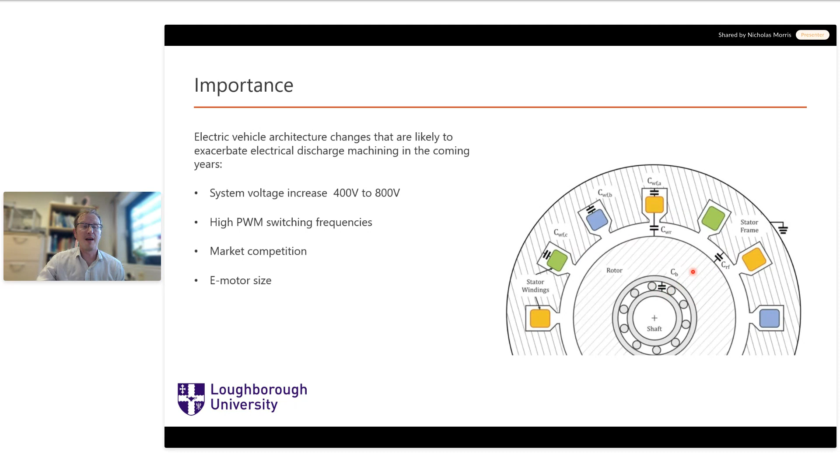So once we have these charge build-ups on the surfaces of the bearing, what can happen? Well, we can have resistive or static dissipative leakage of the current across the bearing. The bearing is comprised of 2 surfaces in contact - an inner race, rolling element, and then rolling element and the outer race. And in between that, we'll entrain a lubricant film.

So if we have the lubricant film there, it has a fairly low conductivity, and as a result, you'll see a small amount of current leaking across that interface when it's in the full film regime of lubrication, elastohydrodynamic. If the voltage is high enough, then the electrical field strength within the lubricant film will exceed the dielectric breakdown voltage of that fluid, and an electrical arc will form. And the electrical arc has a much lower resistance.

So we have a low resistance electrical path formed between the 2 bodies, so inner race and rolling element, or rolling element and outer race. When this happens, we have a significant increase in the current flow between the surfaces, in a fairly small area. These Hertzian contact half widths here are in the order of micrometers, and then the current flow in the breakdown region will be a fraction of this area - so we're talking sub-micrometer in terms of this discharge area.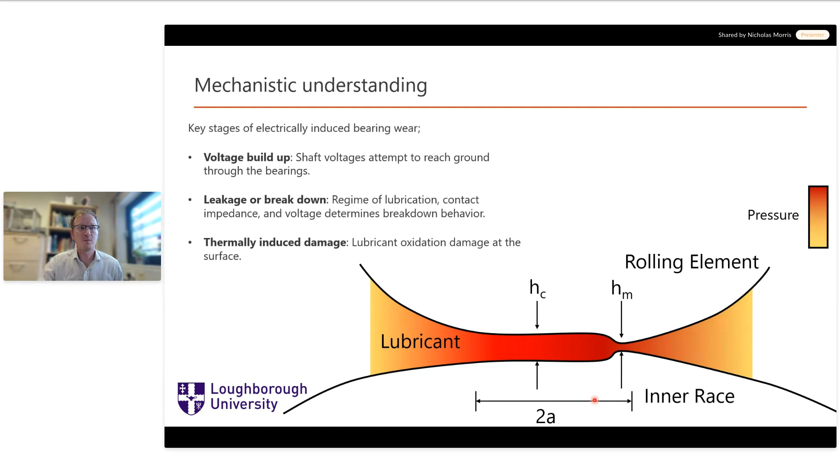So some of the things that we've done here, we've created simple test rigs for fast evaluation of various different properties. The test rig has 2 bearing blocks which house a lubricant bath, rotor bearing to apply a fixed load onto the shaft, representing the rotor weight, and a disc which rotates with the shaft so we can put eccentric masses on there.

So why do we want these particular loads? They're there to replicate the forces which act on an EV bearing. A typical EV rotor weight will be between 80 and 230 newtons, so roughly 8 to 23 kilograms, from what's out there in current technologies.

The bearings have to support that weight, but then you also have the acceleration of the vehicle, and the bearing has to keep the rotor moving with the vehicle as it accelerates around corners and decelerates and accelerates. We also have imbalances in the rotor, typically limited to about 2 G in millimeters per second, to prevent significant eccentric loading of the bearing.

These e-machines can go up to roughly 20,000 RPM, but common urban and extra urban driving might be in the region of 7,000 to 10,000 RPM. This test rig can go up to 9,000 RPM. We've scaled it, so this test rig is much smaller than an electric vehicle motor, and can be easily used by a single person.

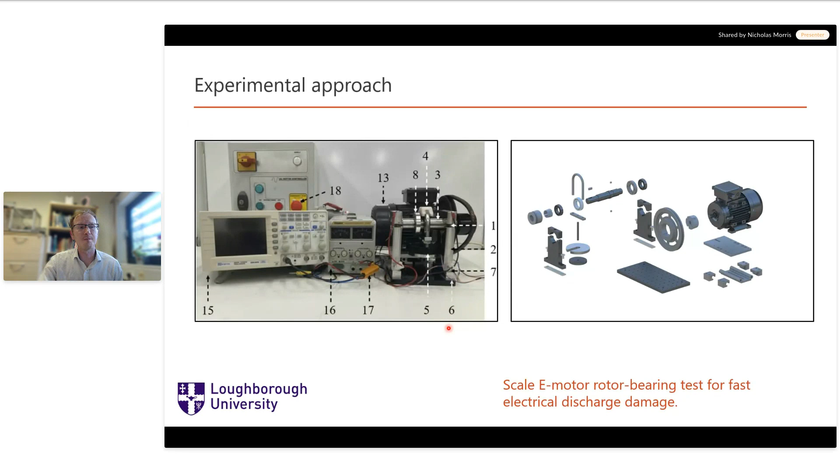As well as the physical test rig, we also have a circuit level analysis, which includes the dynamics - how the rotor moves with time based on the forces applied to it from the bearing and loads - tribology, predicting the film thickness between each of the components, and an electrical model to interpret what those film thicknesses mean in terms of the capacitance formed between each element, as well as the resistance of flow.

The dynamics includes Hertzian contact stiffness, and with the tribology, we're predicting EHL film thickness, both minimum and central film thickness. So we solve this as a nonlinear time varying RC circuit.

Why is it time varying? Because these capacitances and resistances change with the film thickness. As the film thickness changes, those electrical properties also change. So it's coupled in just one direction.

The other thing we consider is the resistance of each of the contacts - between the outer race and rolling elements, rolling element to inner race, drive end and non-drive end bearing, and the resistance of the shaft in between.

The other thing we include within this resistance is we switch between a resistance when we're below the breakdown voltage of the contact, which is comparatively high based on the conductivity of the fluids. If the breakdown voltage is exceeded, we move to the resistance of the arc, which is much, much lower, and as a result we have a significant discharge of current across the contact.

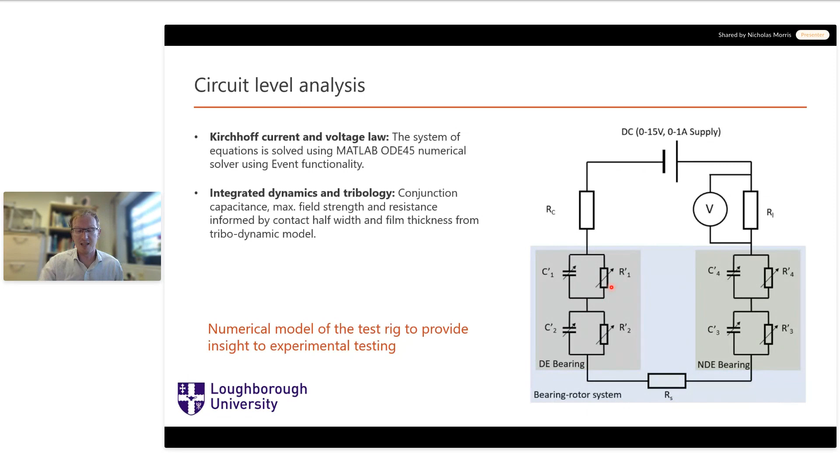As expected, as you increase speed or decrease loads, the EHL film thickness will increase. As a result, the electrical field strength in the contact decreases, meaning you require higher voltage to break the lubricant down electrically and overcome the dielectric strength of the lubricants.

There's standards for measuring the dielectric strength of lubricants. These are measured with electrode distance at 1 inch separation. However, the distance between the rolling elements and the races within these bearings is sub-micrometer, at most several micrometers. So we've got orders of magnitude difference compared to the standard test for dielectric strength.

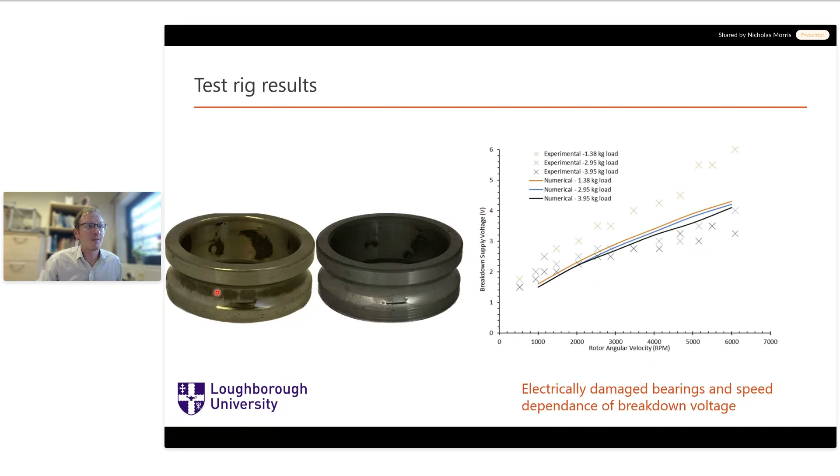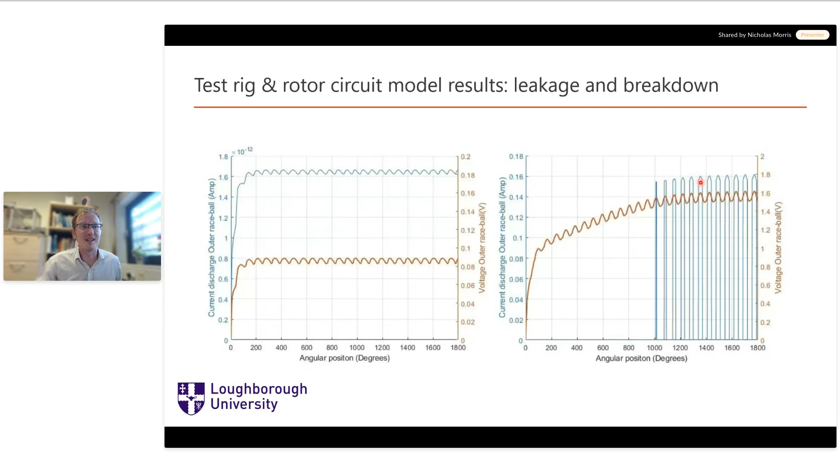Another study I just wanted to cover in today's talk is to look at the role of lubricants with different conductivities. These were kindly given to us by Lubrizol, and we have 5 different lubricants. So we have a base lubricant. Base lubricants typically have a conductivity of something of the order of 1 times 10 to the minus 14 Siemens per centimeter.

Then we have a very low conductivity lubricant, which is only a little bit higher than this in terms of conductivity, say 5 times 10 to the minus 14, and not commonly used for transmission lubrication applications. We have a low, medium, and high conductivity, which are typically used for transmission lubrication applications.

The way that these fluids have been formulated is that the additive pack is the thing that changes the conductivity. The base fluid stays the same throughout, and the viscosity characteristics are very similar throughout all of these, so that we can assume that the film thickness in the contact is very similar for all of these.

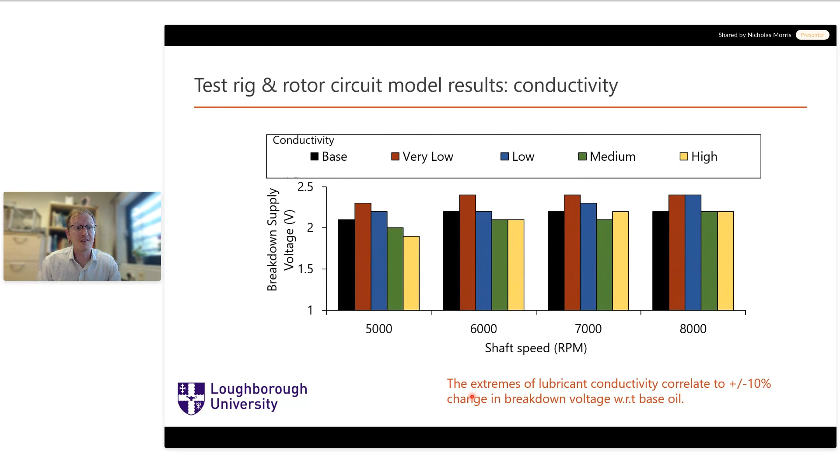And this is probably more likely to be as a result of not the conductivity and dissipative current leakage, but more likely a change in the dielectric strength of the film based on adsorbed layers on the surface relating to the additive pack chemistry.

So the last part of today's talk that I wanted to cover is: what happens if we change the surface roughness on electrical field strength, using electrical field strength to indicate the chance of dielectric breakdown, arcing, and in turn damage. And then what happens if we already have an electrical pit formed because we've had some unexpected condition which has caused surface damage? Will that cause more EDM pits to form in future?

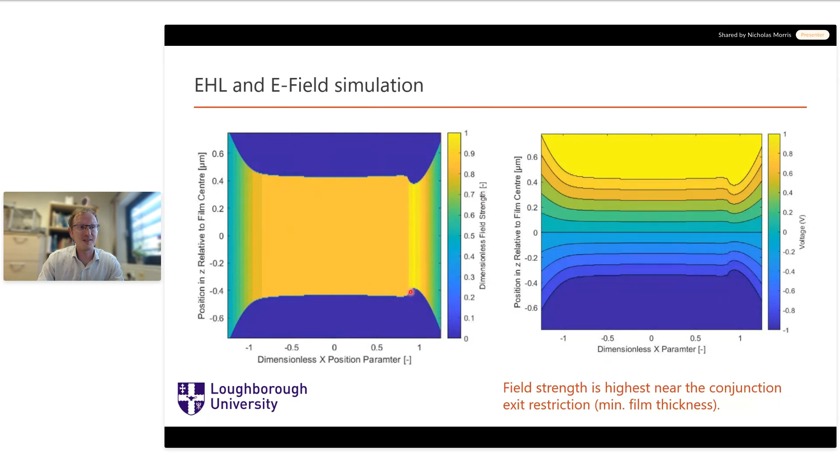If it's higher than that, then whatever's been added to the model, such as the roughness or an electrical discharge machining pit, has either increased or decreased it relative to the smooth case, and relative to what we would commonly assume as a typical value for when breakdown would occur.

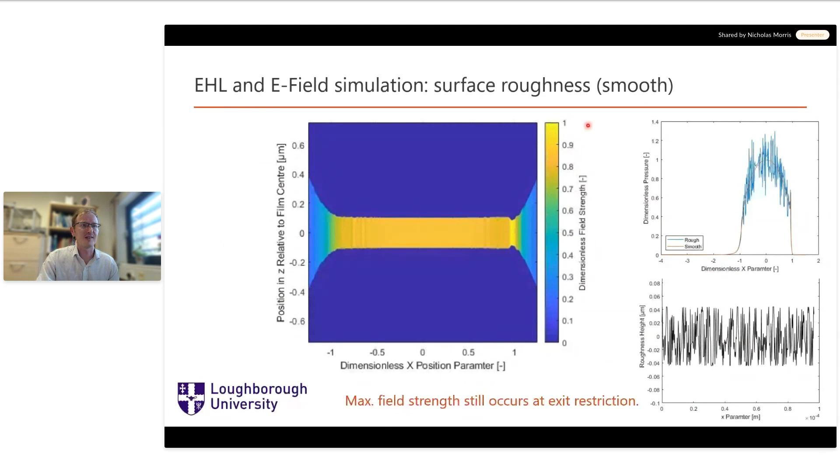So if we apply a very smooth surface roughness, measured with the Bruker white light interferometer we have here at Loughborough, for a very smooth bearing surface, it might have a roughness of tens of nanometers RA. We can input that into the model, and we see that the maximum field strength still occurs at the constriction, at the EHL contact exit, and the maximum field strength is still 1 — so nothing's really changed compared to the smooth case when we have a very smooth surface roughness.

Then we measured the surface roughness from an electrically damaged surface. This was run on the test rig — we took apart the bearing, measured it on the white light interferometer, and then imported that line scan roughness into the model. It's not exactly the same conditions, but it's a comparative representation of what happens.

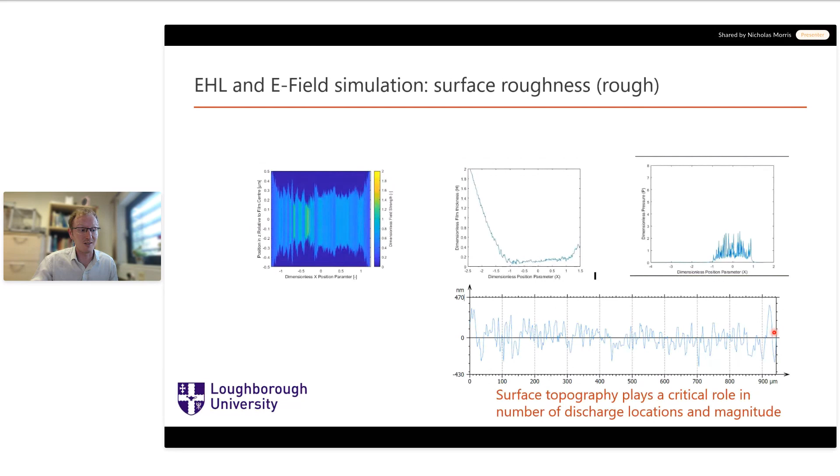This scale now, instead of going to 1, goes to 2. So anything which appears yellow on this figure has about 1.5 to 2 times the electrical field strength of the smooth surface. We can see once the surface has been damaged through fluting, for example, similar to the roughness we see here, the field strength in the contact increases, and the propensity to further electrical damage increases. The threshold that the common mode voltage has to achieve to cause ongoing electrical damage decreases. That's up to 2 times, this model indicates, but it's more to show the order of magnitude that can change, rather than being an exact representation of the contact.

We can also get more significant features that can occur — this would be an EDM pit that you can see on the figure here. If we take a cross section of that and let the EDM pit move through a representative EHL contact, we can see that EDM pit on its own can cause a 2 times increase in field strength compared with the smooth EHL contact I showed a few slides back.

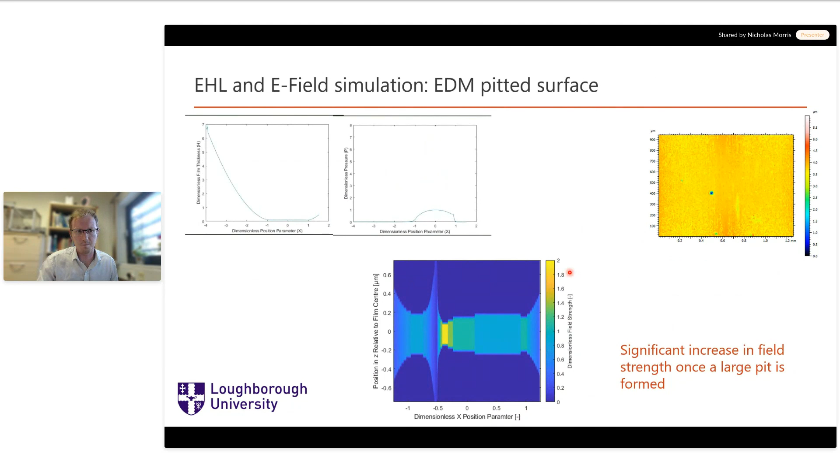In conclusion, we've got a scaled test rig capable of reproducing electrical bearing wear, and a supporting model. I've shown you some example data we've used to investigate additive conductivity on electrical breakdown strength of the fluid film. It shows that although it has a role to play, it's not significant in determining the breakdown voltage, and factors such as speed and load, which relate to EHL film thickness, are more important.

We look at the magnitude of the electrical field strength as a result of legacy EDM pits passing through the contact, and we've shown that perhaps something of the order of twofold magnitude in electrical field strength can occur.

We look at how surface roughness has an effect in terms of increasing the electrical field strength within the contact if the surface is significantly rough, like might occur from a fluted surface, but also that the maximum field strength, where dielectric breakdown is likely to occur, moves. So in a smooth surface, it would be at the EHL constriction at the exit. In a rough, fluted surface, it moves to the individual asperities themselves.